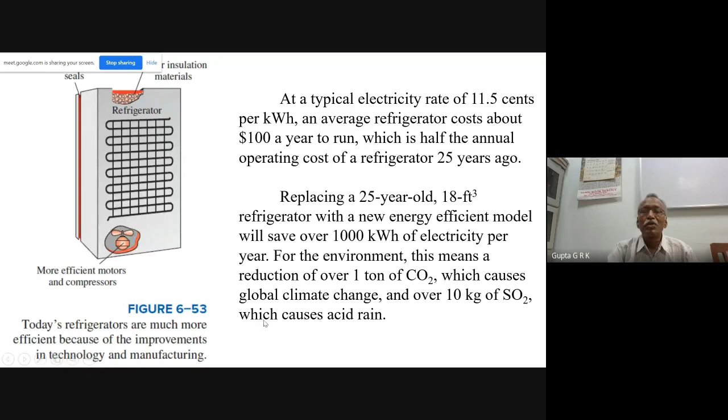We have various other types of refrigerating systems. One is vapor compression refrigeration, which we have studied in class and also in BME. In your final year, we will study absorption refrigeration and thermoelectric refrigeration. The coefficients of performance are 1.3, 0.4, and 0.1. Actually, these absorption and thermoelectric refrigeration systems have lower COPs, but their environmental effects will be less.

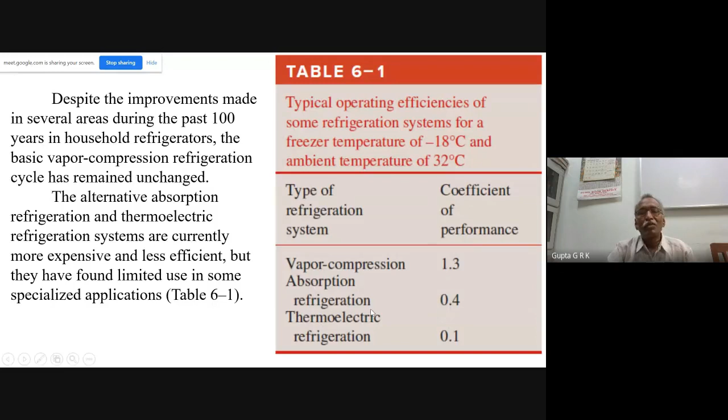These are various types of heat load coming onto the refrigerator. Heat load consists of predictable parts such as heat transfer through the walls, door gaskets of the refrigerator, fan motors, and defrost heaters. And unpredictable parts, which depend on user habits such as opening the door, making ice, and loading the refrigerator. These are the various loads coming onto the refrigerator.

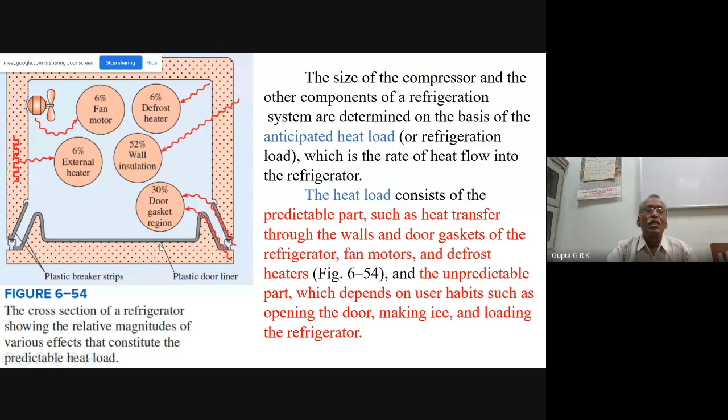What are the conservation measures you can take if you want to reduce the power consumption by the refrigerator in the house? You can put a board there, and all people can follow this. Open the refrigerator door the fewest times possible and for the shortest duration possible, because otherwise we lose heat to the surroundings. Cool hot foods to room temperature first before putting them into the refrigerator. Don't put hot things in first; keep them outside until they reach room temperature, then put them in, to reduce the load.

Clean the condenser coils located beneath the refrigerator, because when dust forms on them, the heat transfer rate gets reduced, so power consumption increases. There should be good heat transfer in the condenser. Check the door gasket for air leaks, and avoid unnecessary low temperature settings. Many people keep unnecessarily low temperature settings, so we should only keep what is needed. Avoid excessive ice buildup, because if ice builds up in the freezer compartment, the heat transfer rate gets reduced and consumption increases.

Use the power saver switch that controls heating coils and prevents condensation on the outside surfaces in humid environments. Do not block the airflow passages. These are the various conservation measures you have to take.

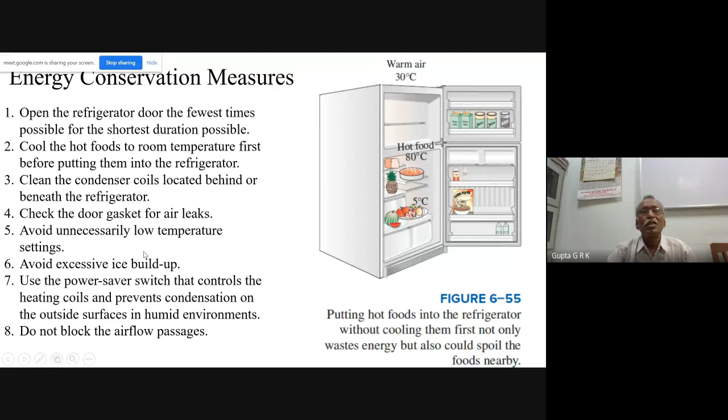Now, if there is a small faulty light bulb inside the refrigerator, what is the effect of it? If the coefficient of performance is 1.3 and the cost of electricity is 12 cents per kilowatt hour, with Q dot as 40 watts, divided by 1.3 COP, this is the power to be consumed. So actually it's 40, and because of this fault, an additional 30.8, so total 70.8 watts we spend, per second.

If annual hours are 8760 hours per year, and you convert it into per year usage, normal operating hours are 61 hours per year, and additional operating hours are 8699 hours per year. So additional power consumption is 70.8 into 8699 watts, converting into kilowatts, you get 616 kilowatt hours per year. And if you see the cost of electricity, it finally comes to $73.9 per year.

Note that not repairing the switch will cost the homeowner about $75 a year. This is alarming when we consider that at $0.12 per kilowatt hour, a typical refrigerator consumes about $100 worth of electricity a year. It is a small thing, but there are so many things. If you are not careful and do not follow this, there will be so much energy consumption. That is about that.

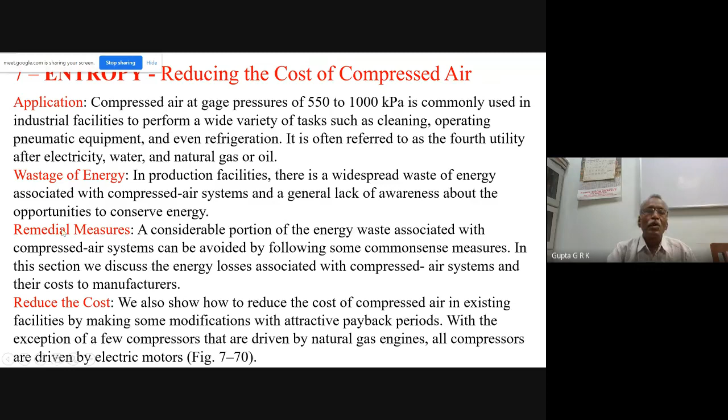Many times in the entropy chapter, we discussed reducing the cost of compressed air. Compressed air, we use it many times. Gauge pressures of 550 to 1000 kilopascals are commonly used in industrial facilities to perform a wide variety of tasks such as cleaning, operating pneumatic equipment, and even refrigeration. It is often referred to as the fourth utility after electricity, water, and natural gas, widely used by the common man. So here we have to think about what wastage of energy happens in compressed air facilities, what remedies we have to take, and how much cost can be reduced.

Okay, these are the things that are discussed.

If you take a compressor of 125 HP, which is 93.21 kilowatts, operating hours are 6,000 hours per year, the unit cost of electricity is this, and motor efficiency is 0.9, then annual energy usage is 621,417 kilowatt hours per year.

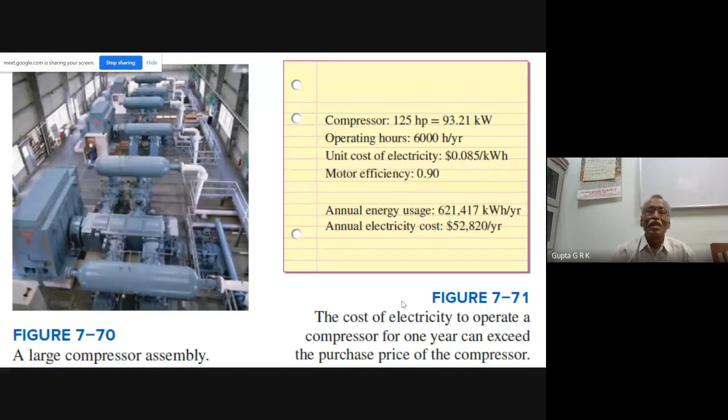And the annual electricity cost is $52,820 per year. So the cost of electricity to operate a compressor for 1 year can exceed the purchase price of the compressor. With 1 year's electricity cost, you could purchase a new compressor. That much is the electricity consumption.

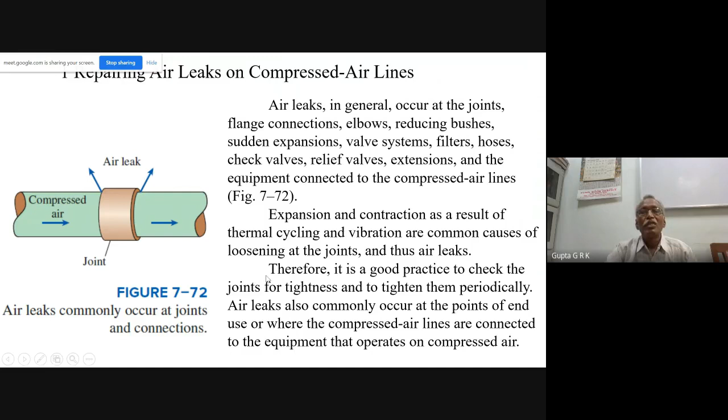So what are all the various possibilities of wastage? One is air leaks on compressed air lines. Because there is high pressure inside and less pressure outside, whenever there is a small gap, air always tries to leak. This is one of the main issues, and how to detect it.

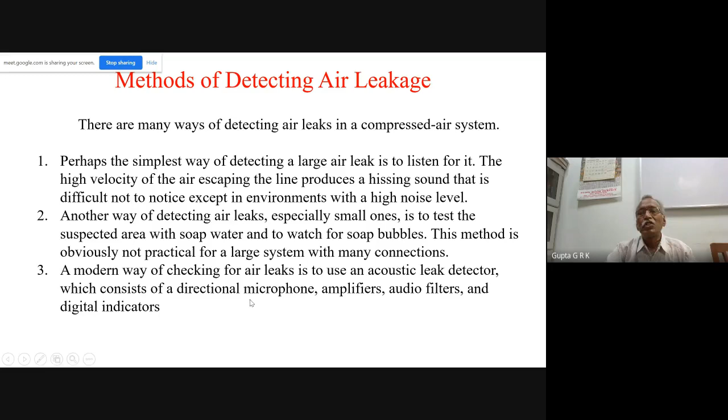Normally by ear, you can hear a hissing sound sometimes. Otherwise, you have to use soap water over the leakage portion, and you will get bubbles, which shows there is a leakage. Nowadays, acoustic leak detectors are available, by which you can find out where the leakage is.

If you want to find out the energy loss due to leakage, use reversible compressor efficiency to get the work for the compressor, and the mass flow of air through the leakage is like flow through a nozzle. If you remember compressible flows in FMHM, you derived the expression for mass flow through a nozzle, and this is the whole expression.

And multiply by the discharge coefficient, which you know about from orifices, mouthpieces, and weirs. So this gives the mass flow of air.

So whatever mass flow we are leaking out, we are wasting the energy spent on that mass. Power wasted equals mass flow leaked into the compressor, in kilojoules per kg, multiplied by the number of kgs per second, which gives the wastage in kilowatts.

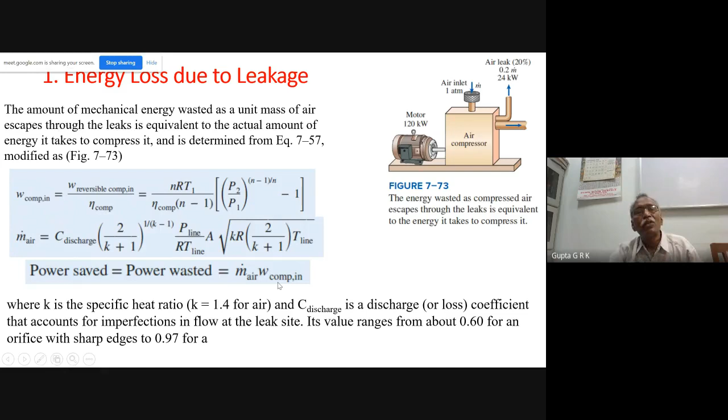This is the way we can find out how much energy is lost due to leakage whenever there is a small leak, and it is demonstrated through a problem. I will not go through this, but the same formulae are used here.

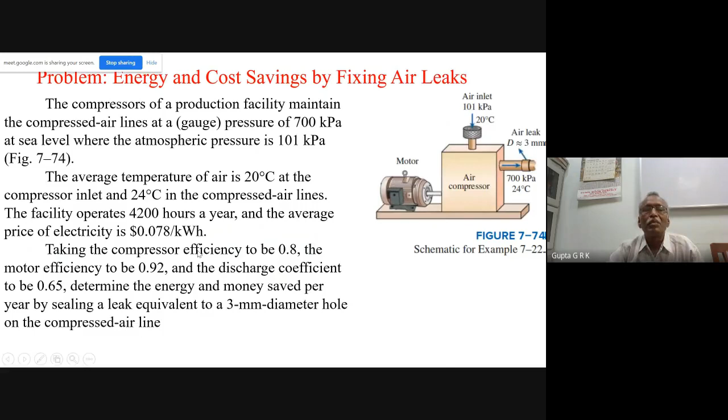This is the compressor work formula from reciprocating air compressors, and the area of cross section of the leak, and mass flow, considering it as a nozzle. So power wasted equals mass flow of air into compressor work, giving the power wasted in kilowatts, 2.563 kilowatts.

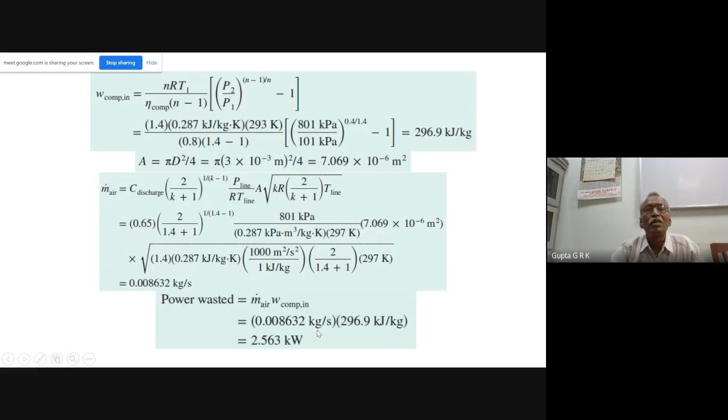You can find out how much is wasted per year, and using this electricity rate, you can see that $913 per year is wasted. Note that the facility will save 11,700 kilowatt hours of electricity, worth $913 a year, when the air leak is fixed. This is a substantial amount for a single leak whose equivalent diameter is 3 mm.

There may be larger diameter leaks with larger mass flow, and there will be many places where leakage occurs, and it will cost a lot.

Another way we can save is by installing high efficiency motors. As time goes on, we are getting more energy efficient motors, because the motor work needed equals the compressor work divided by motor efficiency.

This decides the amount of motor work, or electrical work, we have to spend. So if standard efficiency is eta standard, and the energy efficient one is eta efficient, then W dot compressor times (1 by eta standard minus 1 by eta efficient). Using these values, say initially 60% efficiency, increased to 75%, you can see how much energy you can save.

Again, some numerical work is done here. And one more thing is...

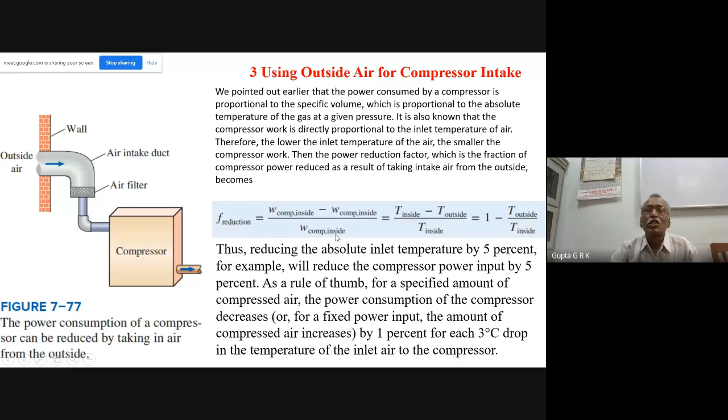Using outside air for compressor intake. We know that compressor work depends on the inlet temperature of the compressor, as you've learned in gas turbines and reciprocating air compressors. Normally within the industry or room where the compressor is used, the temperature will be higher compared to the outside temperature. So if you take outside air instead of inside air for compression, there will be some reduction in power. That is explained here.

And reducing the air pressure setting.

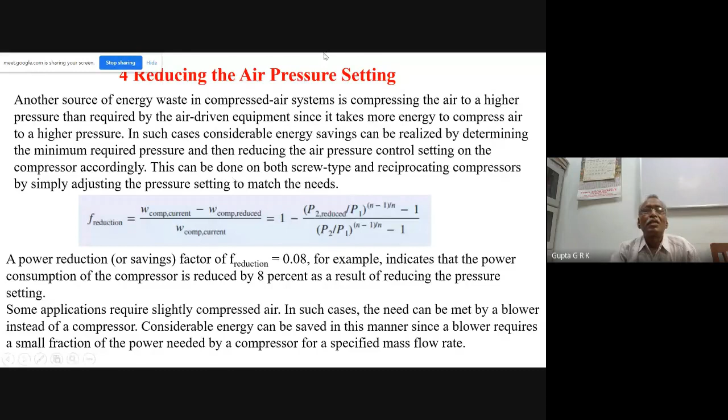As we told regarding the refrigerator, there also unnecessarily you don't put too much cold temperature. Whatever is needed, that is necessary. Because usually if you need some kilopascals, you will try to have higher capacity things for safe purpose, but there is no point in running at that higher capacity. Whatever capacity is needed, that is to be used. That is another way we can save. This also a numerical is done.

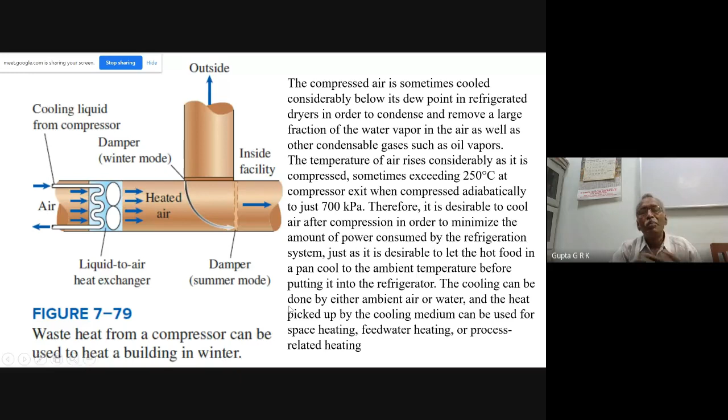Another thing is, many times after compression, this temperature will be very high. It may come to 250 degrees centigrade or something like that. If you don't use high temperature compressed air and want to use low temperature compressed air, that heat can be utilized for some other purpose. You can circulate cooling liquid which takes the heat from the compressed air, and then we can use that. So waste heat from a compressor can be used to heat a building in winter.

Then coming to the exergy chapter, the second law aspects of daily life. Mainly, we know that second law discusses the quality of energy or quality of time, whatever you say. But the first law talks about quantity only.

It is like many times parents say you are not studying much time, and they always want you to sit with the books. But there is no point if you sit with the book all day. How much time effectively you are using is the most important. So here second law concepts are implicit in daily life.

Many successful people seem to make extensive use of them without even realizing it, the quality of it. There is a growing awareness that quality plays an important role. Here you can see a small passage from some journal.

Dr. Held considers himself a survivor of the tick-tock conspiracy. About 4 years ago, right around his 40th birthday, he was putting in 21-hour days, working late, working out, taking care of 3 children, and getting involved in sports. He got about 4 or 5 hours sleep a night. Now he says, now I am in bed at 9:30 and up by 6. I get twice as much done as I used to. I don't have to do things twice or read things 3 times before I understand them.

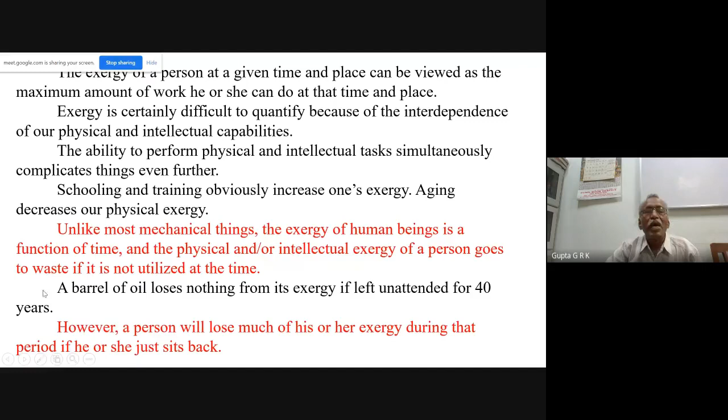A barrel of oil, that is the difference between physical or material things and personal, subjective things. A barrel of oil loses nothing from its exergy if left unattended for 40 years. However, a person will lose much of his or her exergy during that period if he or she just sits back.

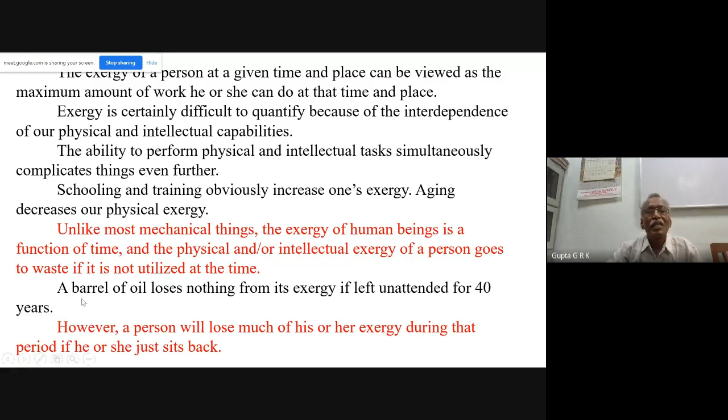Just sitting or taking rest means you are wasting all the capacities you have. So a hardworking laborer may take full use of his physical exergy but little use of his intellectual exergy. A manager will be using his intellectual exergy, and a laborer may be using his physical exergy.

So the other exergy will be wasted. You can use it though - sometimes you can be doing intellectual work, making some exercise, or doing work and listen to something. A laborer, for example, could learn a foreign language or a science by listening to educational CDs while doing his physical work, so he will be using intellectual exergy also.

This is also true for people who spend considerable time commuting to work. It is hoped that someday we will be able to do exergy analysis for people and their activities. Many times in commuting in Pune or Bangalore, we spend a lot of time on transportation. If you are going by car and use that time for other purpose, your exergy can be better used.

Like parallel processing, computers can perform several tasks at once. Why shouldn't human beings be able to do the same? Then you can use your both intellectual and physical exergy to the maximum.

And also we can use the level of alertness. All the day, our alertness will be different. Early morning, during the first 1 or 2 hours, I may be having good alertness, and later the alertness gets decreased. Even after getting up, our alertness gets decreased.

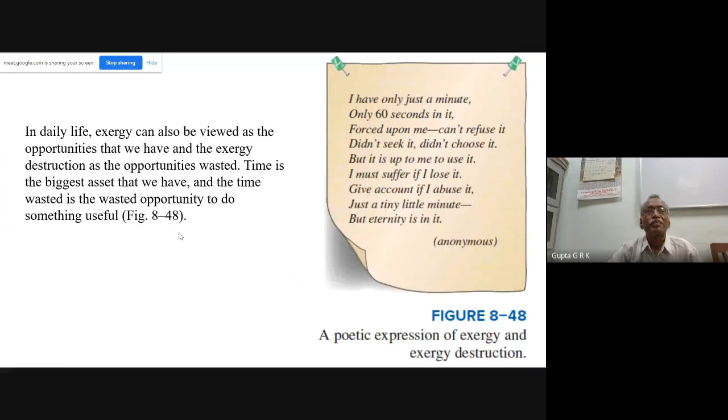Here he talked about comparison, mass and energy which are conserved, entropy and exergy are not conserved. Mass and energy we can understand with our common senses, five senses, but entropy and exergy we cannot perceive by normal means. But these are related to physical mass and energy, which can be conceived.

He also talked about Big Bang Theory, and nature's laws are the invisible government of the earth. A spirit is manifest in the laws of the universe. These laws that constitute the core of the sciences cannot be detected by our five senses. They do not have a material existence, and thus they are not subject to the limitations of time and space. As such, the laws that seem to have infused all matter like a spirit rule everywhere, but they are not anywhere, like entropy and exergy.

So these are the things he discussed. It is very interesting. You should just go through the material.

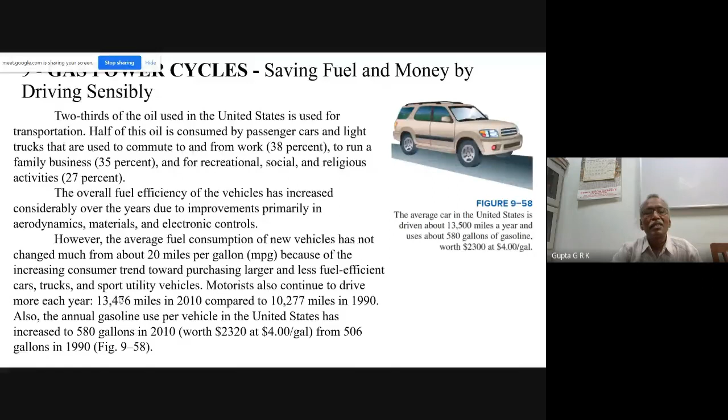Now, in the gas power cycles, he talked about saving fuel and money by driving sensibly. An economical analysis is done on how much a car consumes per kilometer, how many kilometers it runs per day and per year, and how much money is spent on that. All this analysis is done here, so we can reduce fuel consumption by considering various alternatives.

How can you reduce it? By living close to work and shopping areas. If you are in a central area near your work, you can reduce driving. And nowadays people work from home, which leads to a lot of fuel saving.

Also, working longer hours in fewer days, and joining a carpool or starting one. If three or more people join together and go to a place, that reduces consumption, as does using public transportation.

Combining errands into a single trip and planning ahead also helps. So instead of going every day for shopping, if you purchase everything for one month together, it reduces a lot of transportation and money spent. Also, avoid rush hours on roads with heavy traffic and many traffic lights.

Simply walking or bicycling instead of driving to nearby places improves health and physical fitness. And driving only when necessary is the best way to save fuel, money, and the environment too.

Whatever, these are common sense things. There is no technical aspect here, but you can understand it through common sense.

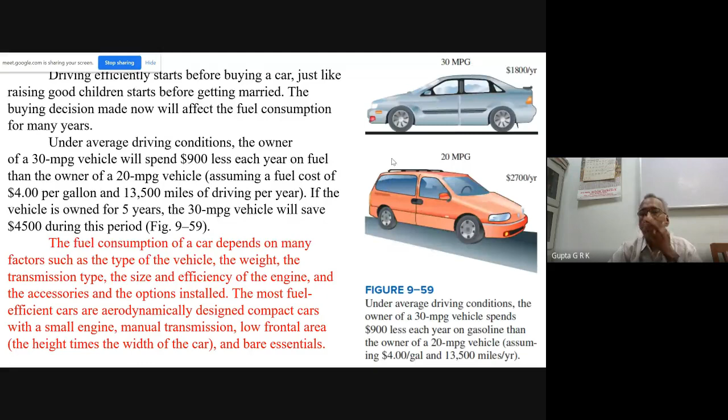Similarly, on highway roads, aerodynamically designed vehicles have a smaller drag coefficient, and thus better fuel economy than box-like vehicles with sharp corners. If you see the shape of this versus this, you can see one is more aerodynamic and will have less air drag or air resistance, so fuel consumption can be reduced by having aerodynamic cars. The overall shape is important because of the frontal area.

Frontal area is the cross-sectional area normal to the direction of the air.

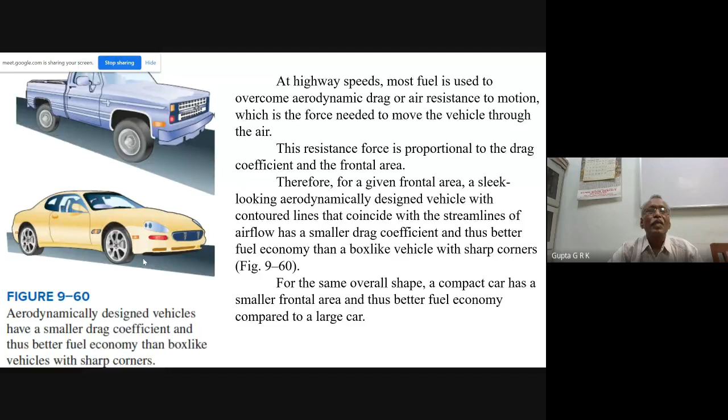Moving around extra weight requires more fuel, and the larger the engine, the greater the rate of fuel consumption. Similarly, if you use diesel engines, efficiency will be higher and consumption will be less, and the fuel cost will also be less.

Nowadays people use automatic transmission like automatic gearing, which increases fuel consumption compared to manual transmission. If you have manual transmission, it reduces fuel consumption.

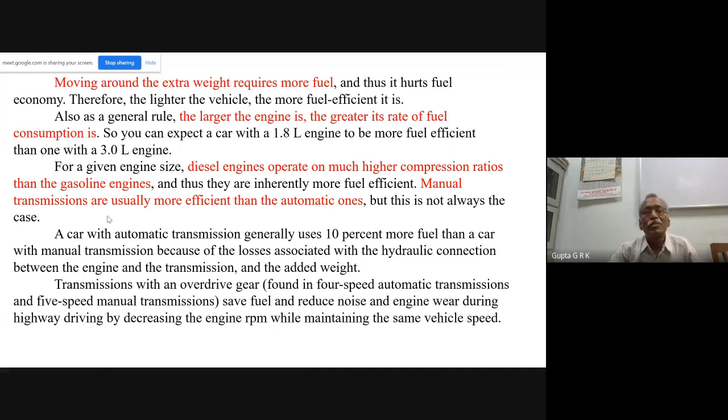Front wheel drive causes better traction, and four-wheel drive provides better traction and braking, thus safer driving. But the added safety comes with increased weight, noise, and cost, and decreases fuel economy. Radial tires reduce fuel consumption, and cruise control saves fuel during long trips on open roads by maintaining steady speed, and so on.

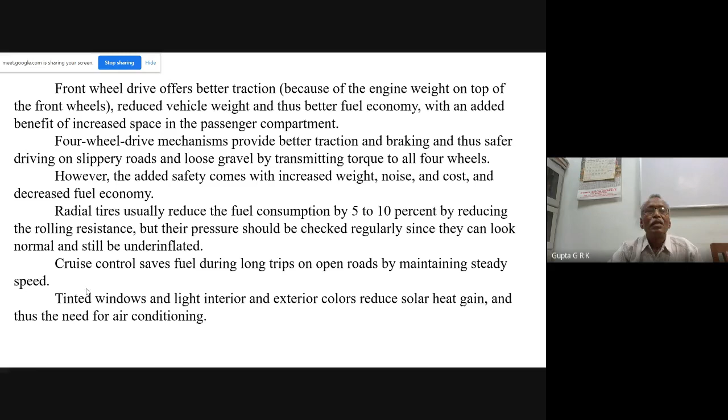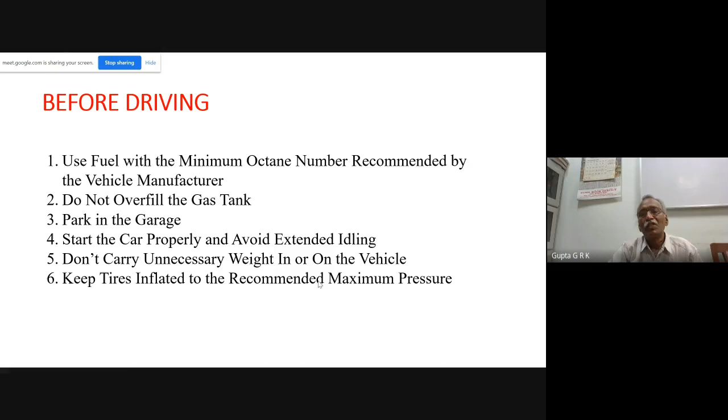What are all the cautions we have to take before driving, while driving, and after driving? Before driving, use fuel with the minimum octane number so it will be more efficient. Do not overfill the gas tank, park in the garage, start the car properly, and avoid extended idling.

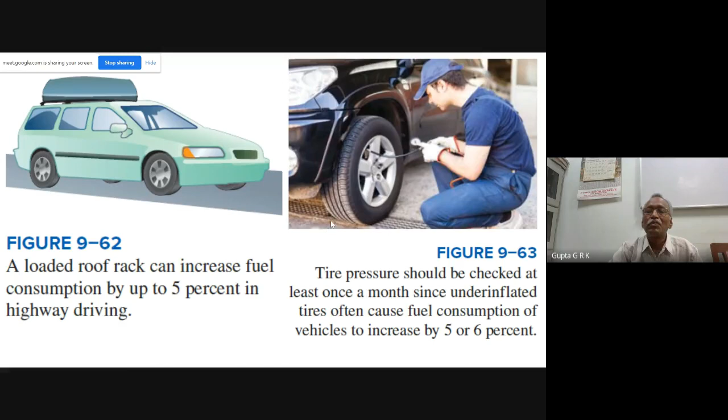Don't carry unnecessary weight in or on the vehicle, and keep tires inflated to the recommended pressure—not too much and not too little. A loaded roof rack can increase fuel consumption by up to 5% in highway driving. Similarly, tire pressure should be checked at least once a month, since underinflated tires often increase fuel consumption by 5 to 6%, because more surface area contacts the road, causing more friction and more consumption.

While driving, what do you have to watch for? Avoid quick starts and sudden stops. Many of these are common sense, but we can prove them mathematically and numerically. Drive at moderate speeds and maintain a constant speed. Anticipate traffic ahead and avoid tailgating—that is, following a big vehicle too closely.

Avoid sudden acceleration and sudden braking. Avoid resting your feet on the clutch or brake pedal while driving—don't keep them continuously on it. Use the highest gear or overdrive during highway driving, and turn the engine off rather than letting it idle.

If you stand at a traffic light, you can see hundreds of vehicles standing there with all engines running. Just imagine how much fuel is getting wasted. Also, use the air conditioner sparingly because it takes work from the engine.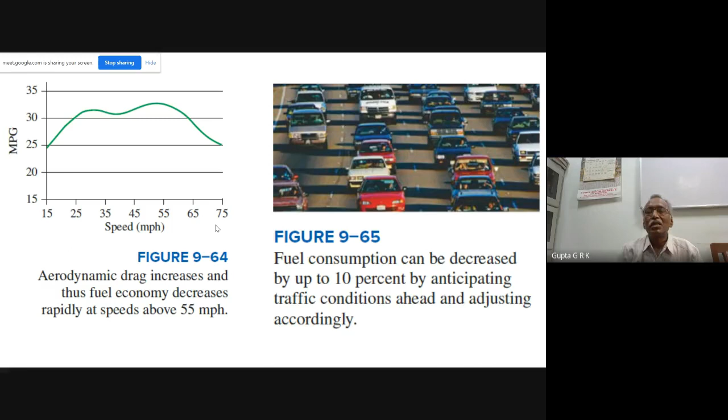Aerodynamic drag increases and fuel economy decreases rapidly at speeds above 55 mph. If your speed is above that, drag increases and fuel consumption increases. Similarly, fuel consumption can be decreased by up to 10% by anticipating traffic conditions ahead and adjusting accordingly—knowing what traffic is normally like at what time so you can plan accordingly.

Unnecessary idling during lengthy waits wastes fuel. When you are waiting at a traffic signal, there's no point idling—just switch off the engine and start again when the green light comes. Also, air conditioning increases fuel consumption.

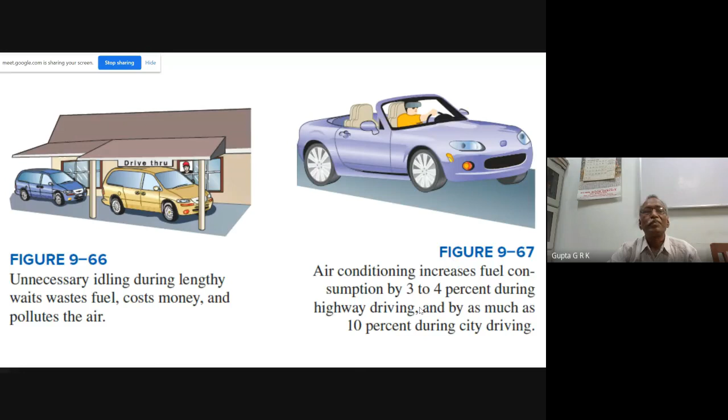After driving, maintenance is also very important. If you just leave the vehicle as is, that's not good—maintenance matters. This includes tightening all belts, checking for cracks or frays on hoses, belts, or wires, and proper maintenance such as checking fluid levels: engine oil, coolant, transmission, brake, power steering, windshield washer, etc., keeping tires properly inflated, lubricating moving components, and replacing clogged air or fuel filters.

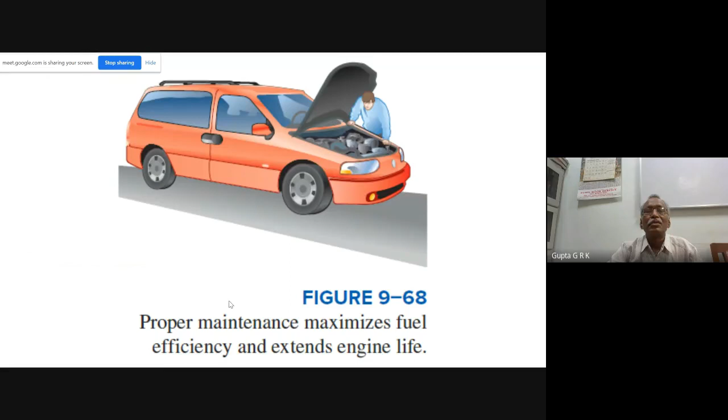All these things maximize fuel efficiency. Clogged air filters increase fuel consumption, so the car should be tuned up regularly. Proper maintenance maximizes fuel efficiency and extends engine life. Clean oil extends engine life—oil also helps cool the engine and provides a seal between the cylinder walls and pistons. Fuel-efficient oils contain certain additives that reduce friction and increase fuel economy.

In summary, a person can save fuel, money, and the environment by purchasing an energy-efficient vehicle, minimizing the amount of driving, being fuel conscious while driving, and maintaining the car properly. These measures have added benefits of enhanced safety, reduced maintenance costs, and extended vehicle life—not only vehicle life, but human life also.

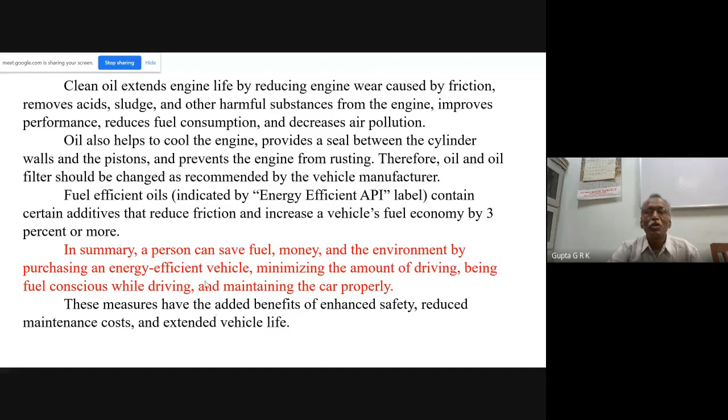In the vapor cycle and combined cycles, we talked about binary vapor cycles. Someone asked me what the binary vapor cycle is. With the exception of a few specialized applications, the working fluid predominantly used in vapor power cycles is water. Water is the best working fluid currently available, but it's far from ideal. The binary cycle attempts to overcome some shortcomings of water and approach the ideal working fluid by using two fluids.

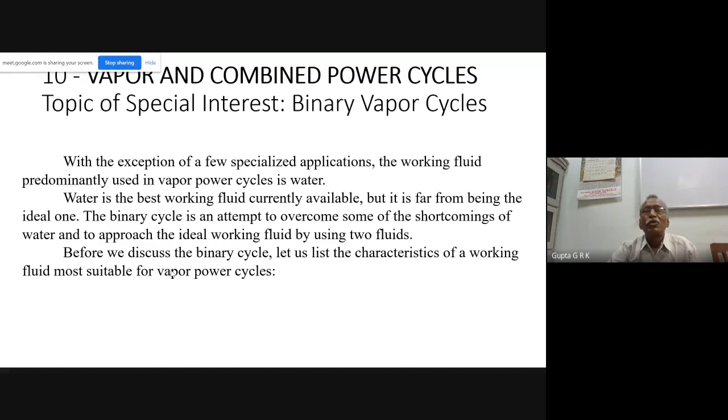So before going further, what are all the qualities of the working fluid? These are the desired qualities of the working fluid.

It should have high critical temperature and safe maximum pressure, low triple point temperature, a condenser pressure that is not too low, and a high enthalpy of vaporization, meaning the dome should be wider at that pressure or temperature. A saturation dome resembling an inverted U, good heat transfer characteristics, and other properties such as being inert, inexpensive, readily available, and non-toxic.

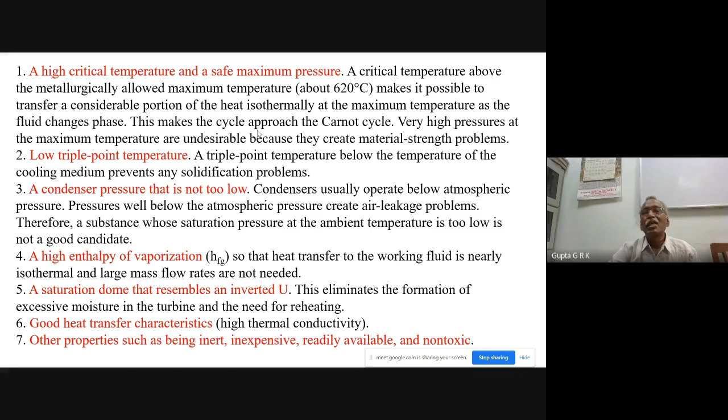There are so many desirable properties, and everything has ranges. No working fluid will satisfy all of them. Each fluid has a particular range of temperatures and pressures that is good for it. So for a particular range you use one fluid, and for another range you use another fluid, so that you get better efficiency. This makes the cycle approach Carnot cycle efficiency by using a binary vapor cycle.

So here there is a mercury cycle and a steam cycle. This is the saturation dome for mercury, and this is the Rankine cycle for mercury. This is the Rankine cycle for steam. Whatever heat is rejected from the mercury cycle becomes the heat supplied to the steam cycle, through a heat exchanger.

For mercury, there is a pump, a boiler, and a turbine, and here instead of a condenser you have a heat exchanger, which condenses the mercury, and that heat supplies the water, which becomes steam. For the steam side there is a pump, a superheater, a steam turbine, and a condenser. This is the bottoming cycle.

We call this the bottoming cycle, and this the topping cycle. If you see, between these two it almost approaches Carnot efficiency. That is the advantage of the binary vapor cycle.

It is evident from the T-S diagram that the binary vapor cycle approximates the Carnot cycle more closely than the steam cycle for the same temperature limits. If I have a steam cycle working between high TH and low TL, it will be quite away from the Carnot cycle. But if you combine these two cycles together, it approximates the Carnot cycle.

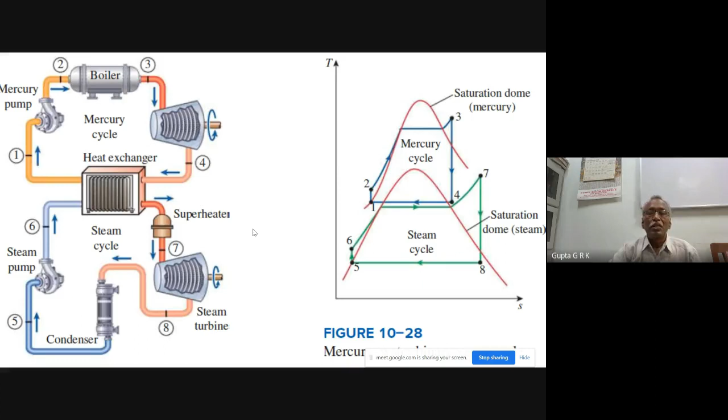That comes to around 55 to 60% sometimes; around 55% is the efficiency we typically get for the combined cycle.

I was talking about other refrigeration systems when I discussed vapor compression. The other refrigeration systems are vapor absorption refrigeration and thermoelectric refrigeration. The main advantage of thermoelectric refrigeration is that there will be no pollutants, and thermoelectric power generation can also be done. So what is this thermoelectric effect?

If you remember, I think you have studied about the Seebeck effect. So what is the Seebeck effect? Can anybody tell me what the Seebeck effect is?

Anybody knows the Seebeck effect or Peltier effect? Direct conversion of temperature difference into electrical voltage. Whenever two dissimilar metals are joined at two points, and one is maintained at higher temperature and one at low temperature, it produces electricity. If you can tap that, that is power generation. And the other thing we can do: if I supply electricity, I can produce a temperature gradient between the two junctions, and actually make a refrigerating effect at one joint. That is the main thing.

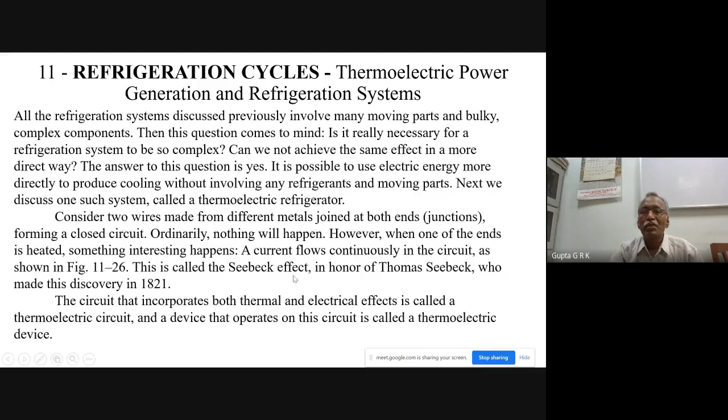Consider two wires made from different metals joined at both end junctions, forming a closed circuit. Ordinarily nothing will happen. However, when one end is heated, something interesting happens - a current flows continuously in the circuit. This is called the Seebeck effect, in honor of Thomas Seebeck, who made this discovery in 1821. So if I have two metals, metal A and metal B, joined at two joints, and one is heated, when the thermoelectric circuit is broken, a potential difference is generated.

The Seebeck effect has two major applications: temperature measurement and power generation. This is used in thermocouples for temperature measurement. What is the amount of electricity generated? If you know that, you can find out the temperature difference between the two joints. If I maintain one joint at a known temperature, I can find out the unknown temperature at the other joint. That is how I can use it for temperature measurement, and also for power generation, because it generates power if I maintain both joints at different temperatures.

We can measure the driving force, the electromotive force, or the voltage generated in the circuit with a voltmeter. The voltage generated is a function of the temperature difference and the materials of the two wires used. Therefore, temperature can be measured by simply measuring the voltage. The two wires used to measure temperature in this manner form a thermocouple. This is called a thermocouple, and you are going to study about thermocouples in your mechanical measurements course next year.

So these two different metals - there are so many thermocouples available. Copper-constantan thermocouples are one of the popular ones. And the Seebeck effect also forms the basis for thermoelectric power generation.

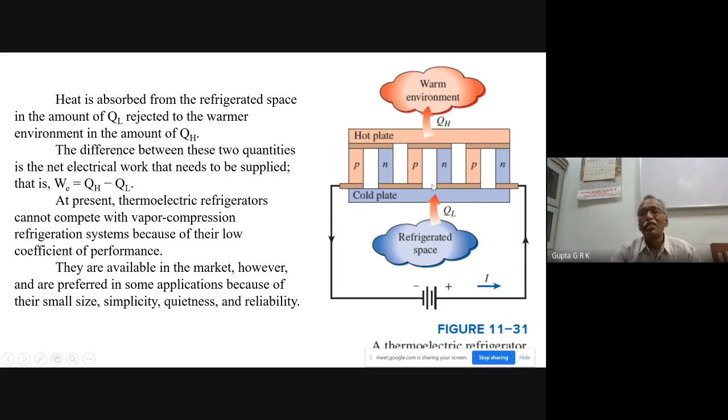At present, this is the thermoelectric refrigerator. So if I reverse the cycle, I will get the thermoelectric refrigerator.

So this honor belongs to... if Seebeck had been fluent in thermodynamics, he would have probably tried reversing the direction of the flow of electrons in the thermoelectric circuit to create a refrigerating effect. He produced power generation and worked on that part, but he never tried for refrigeration, because he may not have been good at thermodynamics, he is telling.

But the honor belongs to Jean-Charles Athanase Peltier. This is called the Peltier effect, who discovered this phenomenon in 1834. He noticed during his experiments that when a small current was passed through the junction of two dissimilar wires, the junction was cooled. This is called the Peltier effect, and it forms the basis of thermoelectric refrigeration.

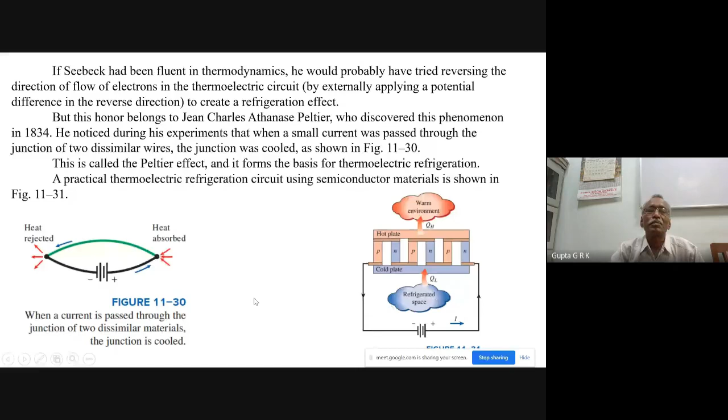So here power is supplied, and heat is absorbed and heat is rejected here. So when heat is absorbed, if this is at room temperature, I can maintain this at lower temperatures. That is the principle of thermoelectric refrigeration. So here there is a warm environment, here this is the refrigerated space, and if I have these thermocouples added like this, I can maintain this refrigerated space at low temperature. That is what is called thermoelectric refrigeration.

Some more chapters are there which are not in thermodynamics, so here chemical thermodynamics is one chapter where he talked about fuel cells. This is another thing which is widely getting popular nowadays, to produce power which is environmentally friendly, and people are trying to have automobiles also run with fuel cells. So you can go through the book. These are the things I wanted to cover.

Anything you like to ask?

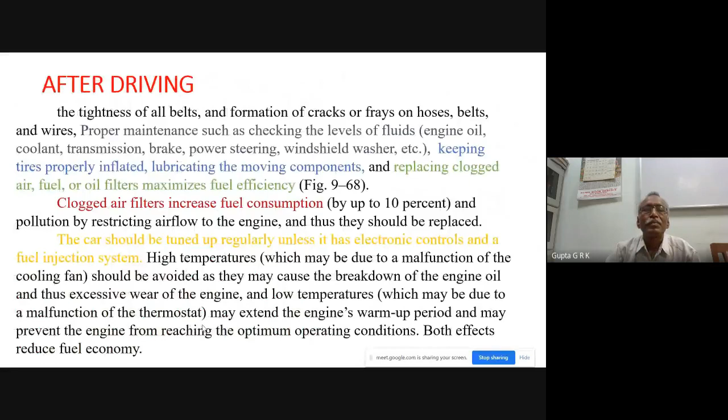So we will end with a small story. There are, I think, 2 stories I made. Just recently, I think yesterday, I came across one person, right? He is Ranjit Singh Disale. It came on WhatsApp, a video came, and then I searched about him, what he is.

He is Disale, who arrived at Zilla Parishad Primary School in Paritewadi village in Solapur district in 2009, when it was a dilapidated building, completely horrible, sandwiched between a cattle shed and a storeroom. Such is the school he was given. In 2009, he became a school teacher, and he took on the task of turning things around and ensuring that the textbooks were available in the local language for the pupils, because they were in English medium and those students were from a very rural background, so they didn't know how to read English.

To make the learning quick, what he did is, although he was not of that local language, he learned the local language and translated all the books into the local language of the pupils, and then supplied them. Not only that, Disale not only translated the class textbooks into his pupils' mother tongue, but also embedded them with unique QR codes to give students access to audio poems, video lectures, stories, and assignments.